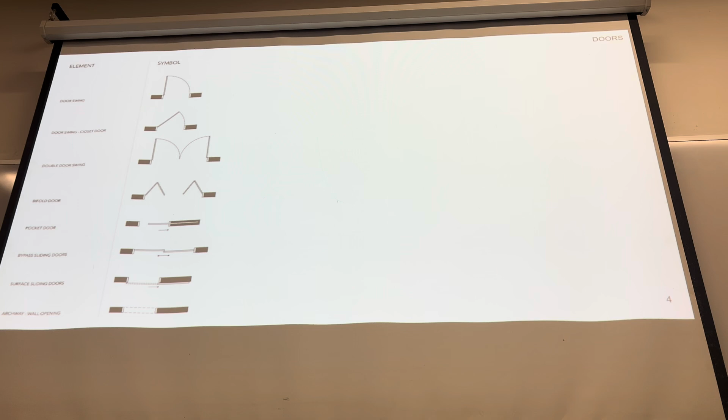Doors, different types of doors. Don't put a little tiny 3-foot door at the big grand lobby entrance of your building. Think about different types of doors. Here's how they might be drawn. Windows, it's the same thing. Windows are about to become a big thing for you. So maybe in your unit plans or floor plans, you're not drawing the window with a double line, but you're indicating with a little box or something where those might start to go.

That's going to start to be the thing that feeds into your unit plan organization, because that's the hardest thing, getting the light and air access to the rooms that need it. Which rooms need access to light and air? Bedroom. Which other rooms? Kitchen. Nope. Bathroom. Living room. No bathroom. The living room and the bedrooms need access to light and air. And that means operable windows. Skylights don't count as operable windows.

Bathrooms and kitchens do not necessarily, although it's always nice. The more light you can bring into the apartment, the better. But also keep in mind that furniture goes on walls, things go on walls. If your whole building is glass, you're gonna be looking up at those things. We talked a little bit about that on the site visit, what's the right size and the sill height for a residential window. Okay.

Nice. Just to kind of a look at sort of how those things might start to come together. This lecture is also kind of pieced together from a lot of other stuff, but I think this is just kind of thinking about line type and how you're kind of communicating stuff.

Again, not expecting to see this on Tuesday, but in the bottom, when you use the final piece, you're gonna expect dimensions and everything on it? No dimensions. This is annotated. You guys don't need to be annotating things. You'll probably be looking at something more like this. So you'll have double thick walls for sure. You're gonna be drawing furniture for sure.

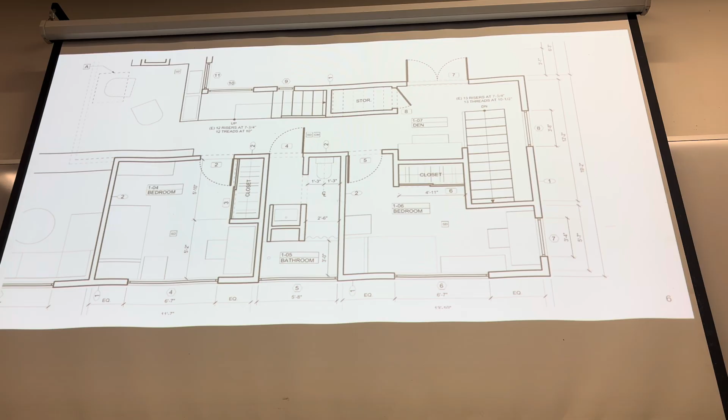Room organizations. Building Construction Illustrated, Francis D.K. Ching. Have any of you guys heard of this book? I have it. You have it? Great. I reference it probably once to 3 times a week in the office. It's full of sticky notes and stuff. Could be a great thing for you guys to purchase. I'm sure the library has some copies. I have an online PDF that I'll also upload to Canvas. Ton of really good information in there.

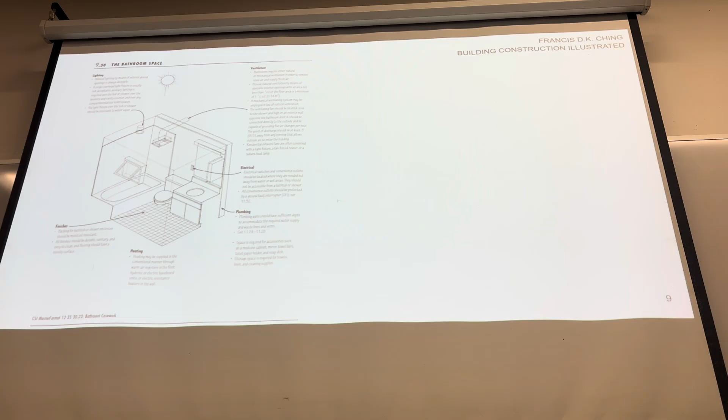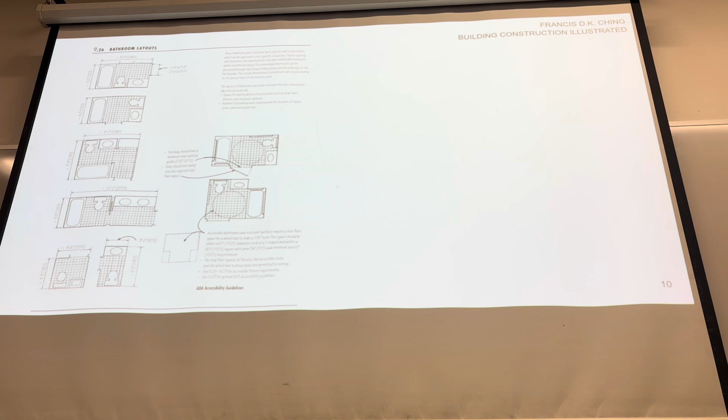This is from that. The bathroom. This is just kind of talking about the general components of the bathroom and how they work. Here are some basic layouts. Again, people have been designing bathrooms for a long, long time. Don't reinvent the wheel here, especially at this early stage of unit plan development. Get a box that's the right size and be working with that. Again, I'm not expecting you guys to necessarily have bathroom zones allocated for Tuesday, but as you're working through them. And there are various clearances that we'll get into once we're working a little closer.

I like to show this plan because here's a lot of kind of typical bathroom layout. As you get further, you might think about this, which is what I would consider the kind of exploded bathroom. As a girl with 4 sisters, you can imagine what our bathroom looked like as we were growing up and how precious time in the bathroom was. What I like about this plan is that you have shower, toilet, and sink all accessible on their own so that 3 people could be using this bathroom at once. So just things for you to think about in terms of the generic way that it's done versus how you might think about it in your space. And that's what that bathroom looks like.

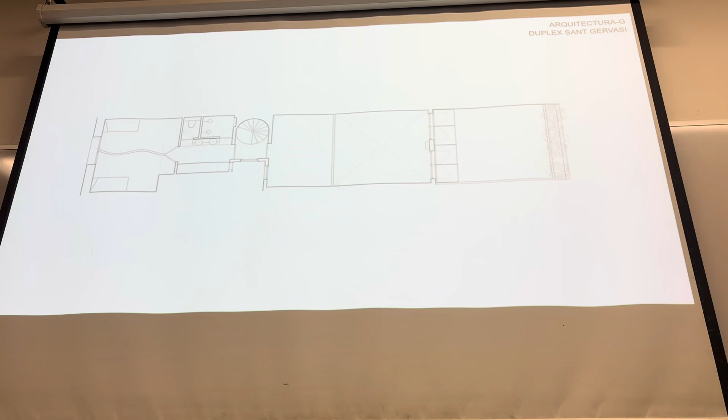This is one of my favorite. I've also gone through and put the name of the architect and the name of the project on every single slide. These are all good things for you to look up and reference. This talks a little bit about the different plumbing fixtures and the clearances around them. The kitchen space.

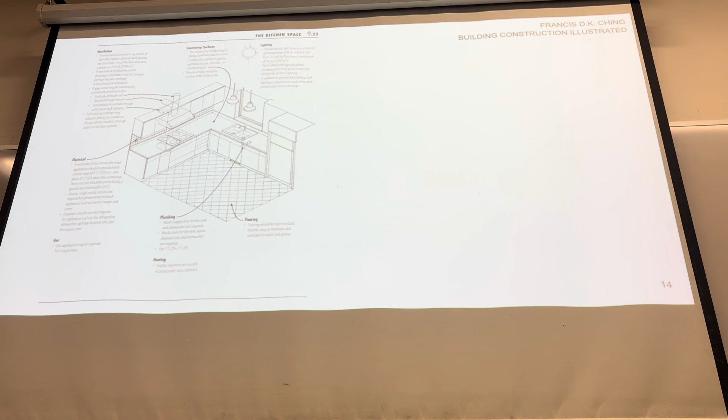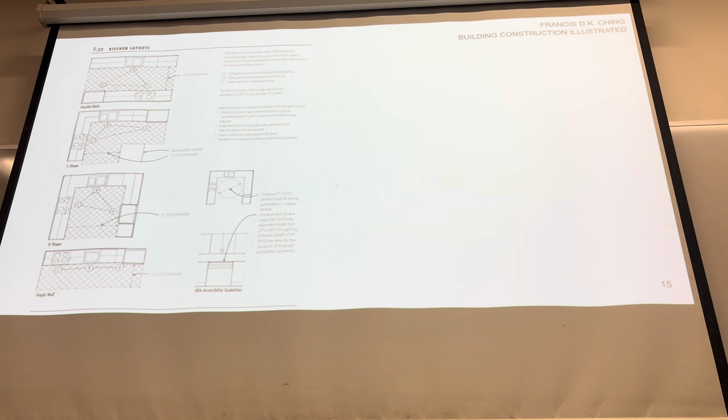Some general kitchen layouts. An important thing to think about is the relationship between the 3 main components of a working kitchen: the food storage, refrigerator, big one, the sink, and the cook surface. So this is talking about triangle organizations, which has always been the most effective way of working at it. A linear layout also works, but ideally you're trying to minimize distances between those things in order to make the kitchen efficient to use. And this then talks a little bit about where those things might go and how much space they take up. And again, we'll get into these details later, but I just wanted you to have them in front of you.

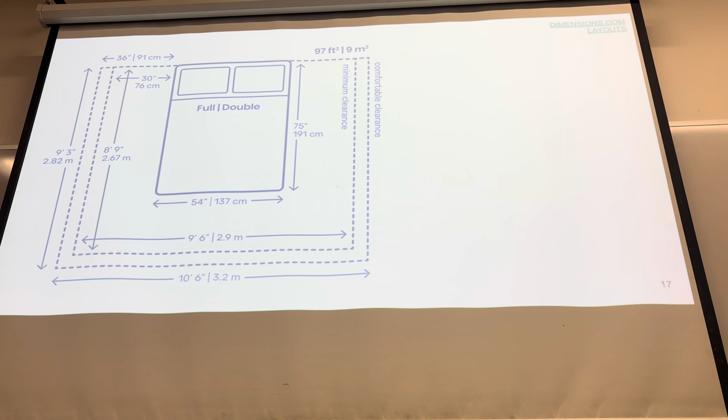This is dimensions.com. I think it's a very helpful website. It has furniture blocks, first of all. You can get some stuff for free, you can make an account and maybe pay for some stuff. Anyway, generally how much space things should have around them and how big things like a double bed are, general room layouts for bedrooms and things like that.

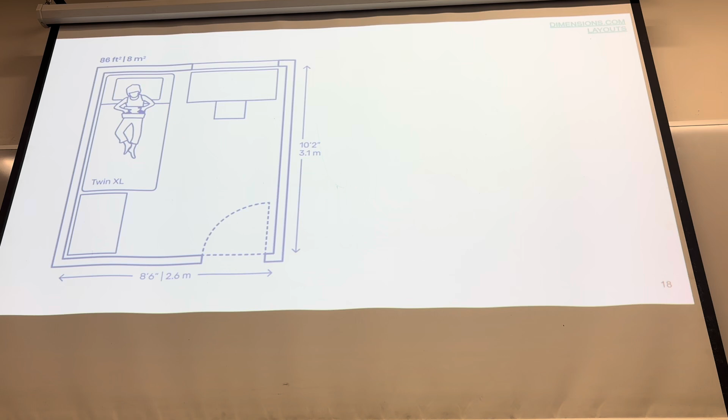I think 8'6" is a pretty minimal kind of dimension for a bedroom. So this is going to become relevant as you have a 6,000 square foot unit, which we're maybe not going to have anymore, and you're trying to fit 5 bedrooms in it: how is that wall with the window access getting divided up and broken into these rooms? I don't want to see 5 foot wide, 20 feet long bedrooms, because that rectangle is not really usable with bedroom furniture, right?

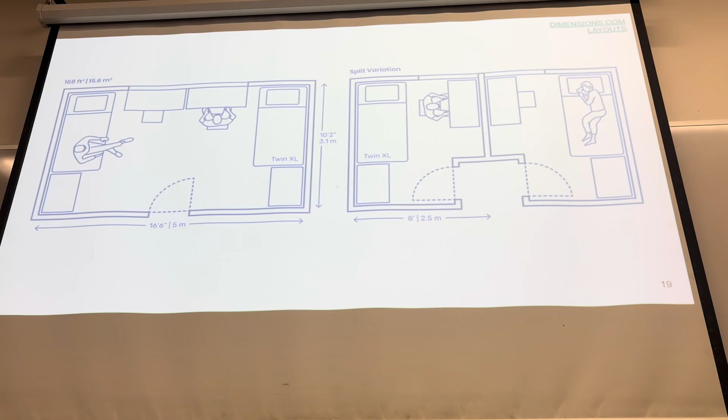Thinking about just the difference between living with your sibling in the same room, ideas about privacy, versus splitting that and having this very different relationship to someone and this very different idea about public and private within the unit.

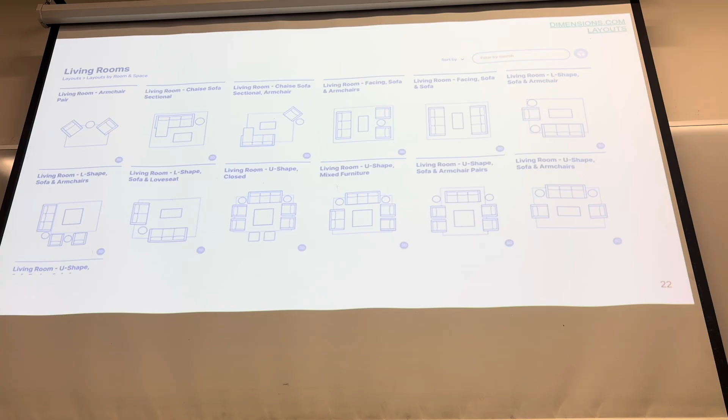This is sort of a weird place for this to be, but this is an interesting apartment. I think it actually comes up in here. I'm gonna talk about it in a different slide because it's somewhere else in here. Again, bedroom layouts, living room furniture, they have all that kind of stuff there. I would, again, grab these things as blocks just so you understand the scale of what's happening.

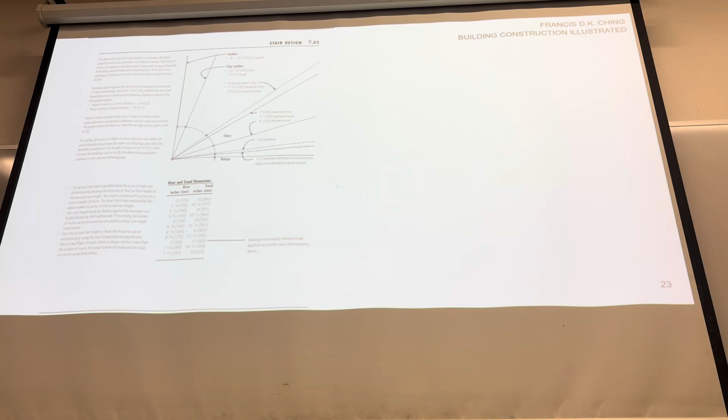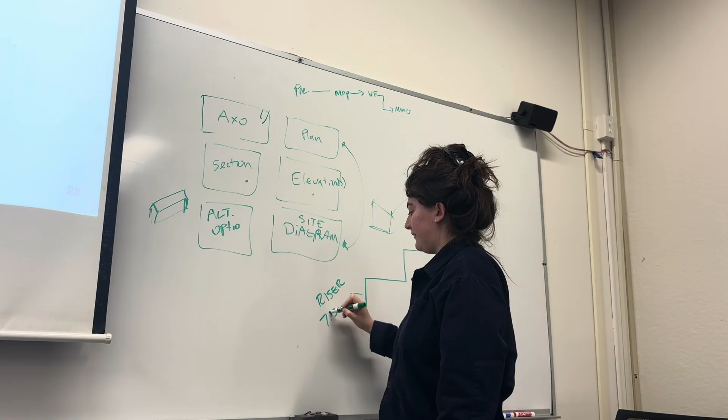Stairs, everybody please write this down. Your stair, so, okay, here's a stair. This part of the stair, does anyone know what that's called? The riser, great. Your riser can be a maximum of 7.5 inches, max, okay? Minimum 4, right? I don't think that you're really gonna be dealing with minimums too much in the stair.

The stair is a big thing. A lot of you have 2-story units. You're gonna be able to fit stairs in these units. The stairs are a good thing to put in places where you don't have light. But the double high space that's created by that is also something really interesting to think about. Think about those sectional connections. 2-story units are lovely. Think about taking advantage of that.

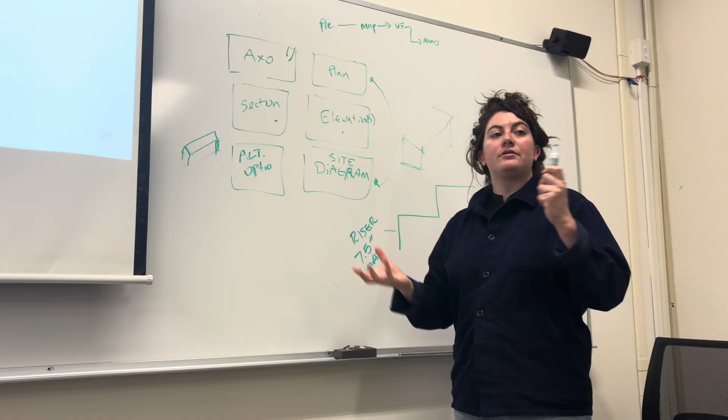If it's just a big floor on top of another floor with just the hole big enough for the stair, it's kind of just like a 1-story unit, right? How can you think about introducing some double high spaces? This is relevant internal to the unit and also in your circulation and in more of your public spaces. How are you bringing that kind of openness sectionally into your section?

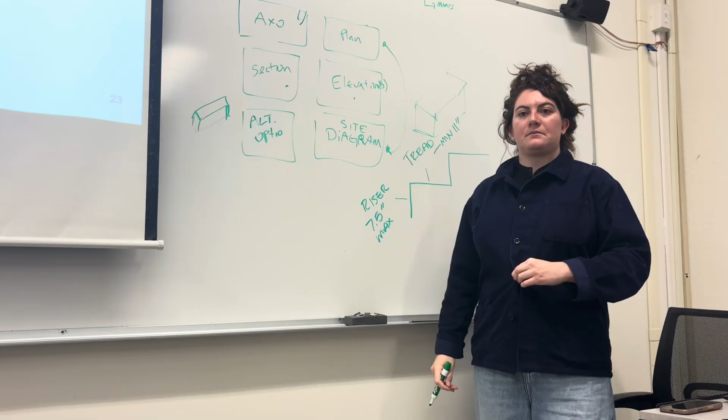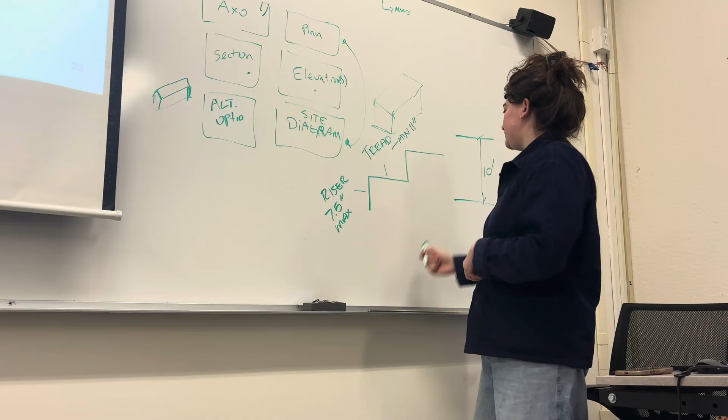What's this one called? Run. This is called the tread. That's where your foot goes. I'm gonna call the minimum for this 11 inches. Okay? So I'm telling you this because let's say your floors are 10 feet apart, right? The first thing you should do is take 10, multiply it by 12. I've got 120 vertical inches.

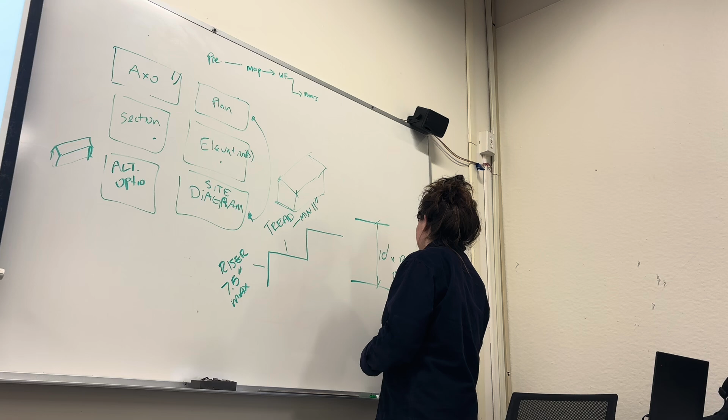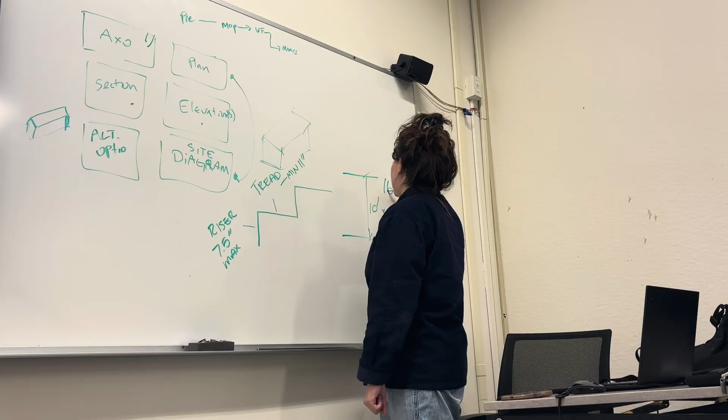Now I'm gonna divide that by 7.5. Does someone wanna do that for me really quickly? It's gonna be about 15. 16 flat. Nice. So if you have 10-foot floors, it means you're looking at 16 risers in order to get me there, right? And that means I need 15 treads, because the landing is at the top. Okay? And those treads are 11 inches long. So that means that you need that much length of space to fit your stair in.

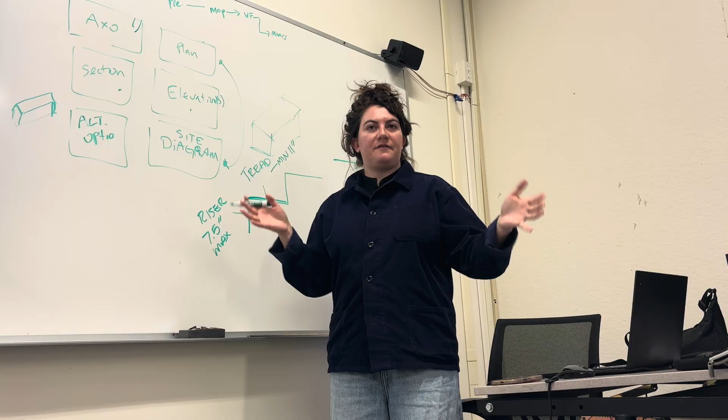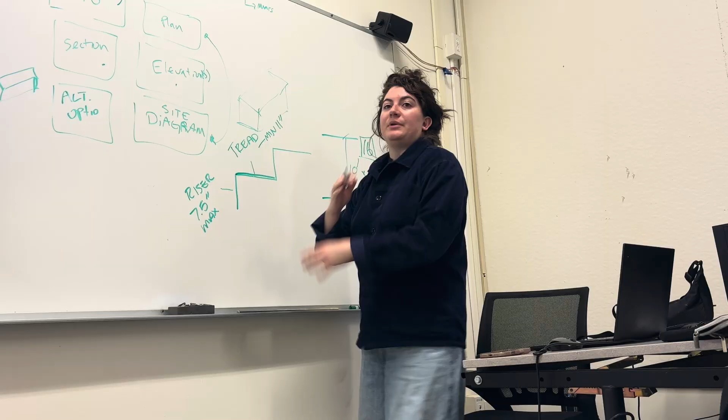You can look at the Ching book here, sorry. Some different ways that stairs can be organized. They can be spirals, they can switch back on each other, they can just be straight runs. You guys can get creative with that. Maybe in some of your bigger spaces or even in the unit, if you have triangular sort of zones, maybe that starts to become a sort of special stair, right? Some of those spaces you can fit that in.

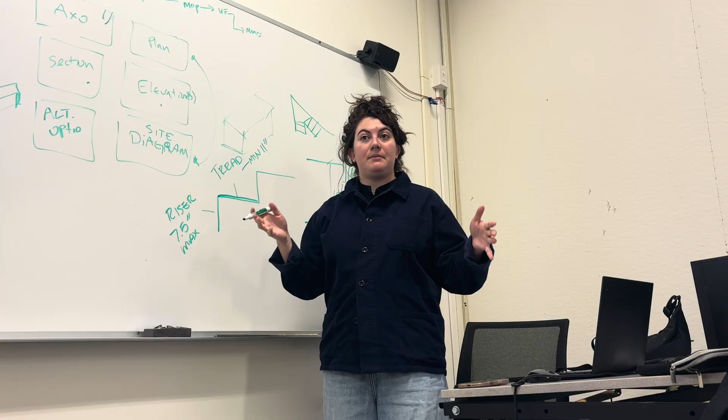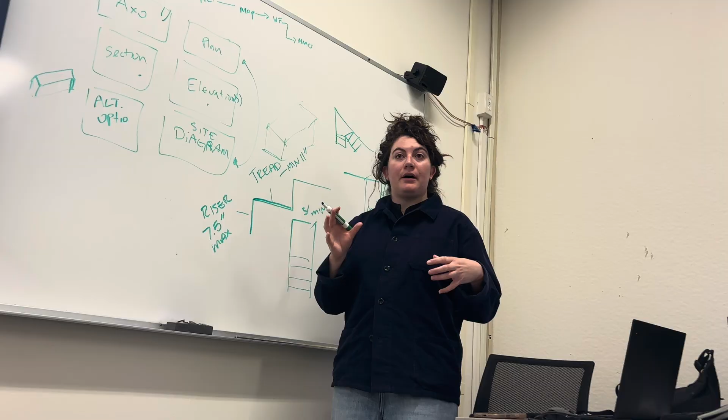The stair needs to be 3 feet wide, minimum, right? Okay, and at the top and bottom, you need a 3-foot by 3-foot landing, okay? And remember, let's say I have a staircase, I'm just gonna erase this.

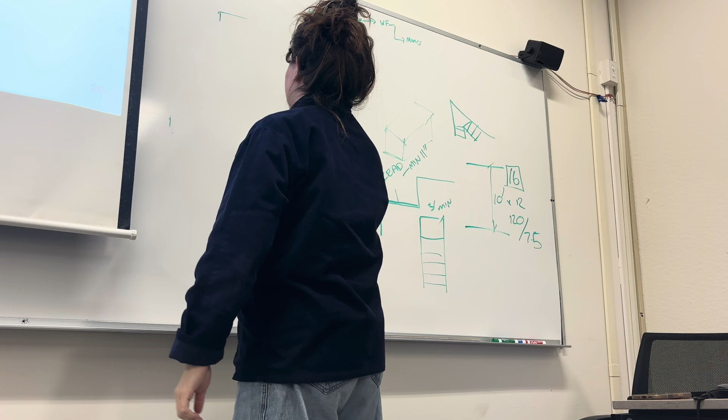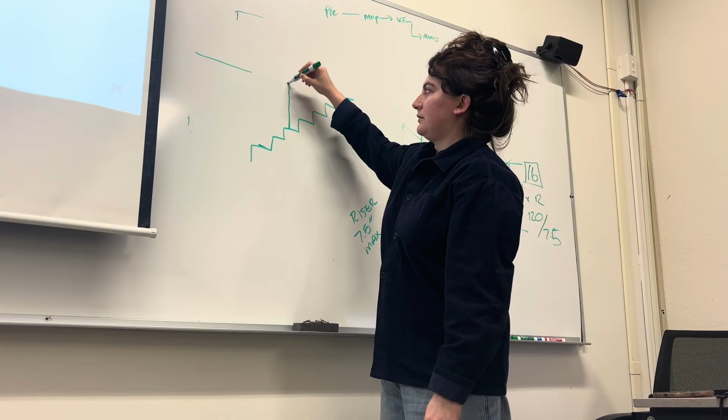Beautiful. Here's my floor, right? I need a hole in this floor in order for my head not to hit the ceiling. I've had this conversation a lot of times with third-year students that don't understand that you need a hole above the stairs in order to fit them.

And I say that kind of jokingly, but it's hard. These are really kind of spatial relationships between plan and section and the human body that are difficult to grasp. Thinking spatially doesn't come naturally to everybody. It's important for being an architect. You can always learn these things, and that's where you're kind of, you know, a guardrail there, there's your landing.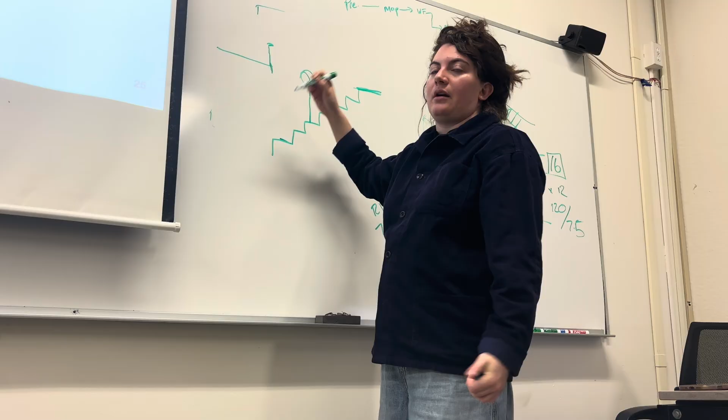This is all of a sudden now this kind of sectional relationship between these two floors. So make sure that you're also thinking about the implications on the second floor of that stair, i.e. a hole, so that you can do it. Again, the minimum head height in a stair is 6'8". So this thing could hang over a little bit.

We have projects where we really capitalize on that. Especially if you have 10-foot floors, you don't need the entire floor to be a hole, but that hole needs to be big enough so that at least at 6'8", this guy's really tall, you're good. Does that make sense? Okay, that'll be an important one going forward. So stairs, again, all kinds of stairs.

Okay, now I'm gonna talk about unit organizations. I've made a series of diagrams, thinking about objects, perimeters, and zones. There's a ton of ways to design units. Look at as many unit plans as you can. We've all talked about Divisare, right? Great one. You can look at plans of apartments. While you're on spring break, just spend an hour, look through some stuff, get inspired.

Objects. So, things that don't need light, for example. These diagrams are a little bit based on more of an ADU or a building that might have access to light on all four sides. But thinking about this in terms of your unit, the objects can start to divide space in a nice way. I would try to eliminate a lot of walls that just separate spaces and try to pack those walls with program that you also need to include. Closets are a really good way to do that.

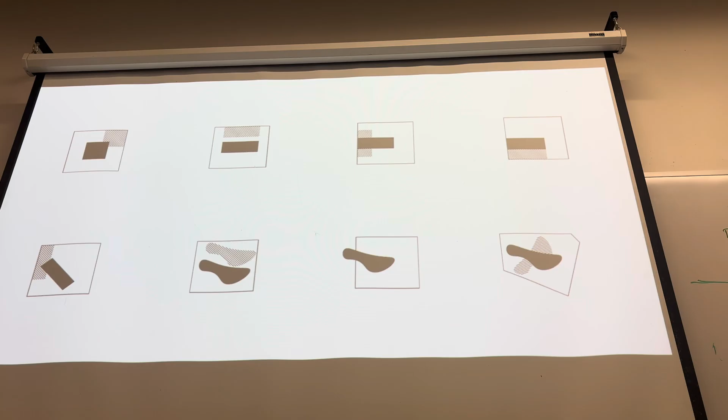Sorry, bear with me on this. The spaces between them become like transition zones, and you're producing these different size shapes by the way that you're positioning that chunk of object. Some plans that start to do that. These are maybe more the size of a unit plan for this one, right? See how that's working? We have the bathroom and laundry here. There's not really any just walls in this plan. This is acting as a separation of the space between these two things.

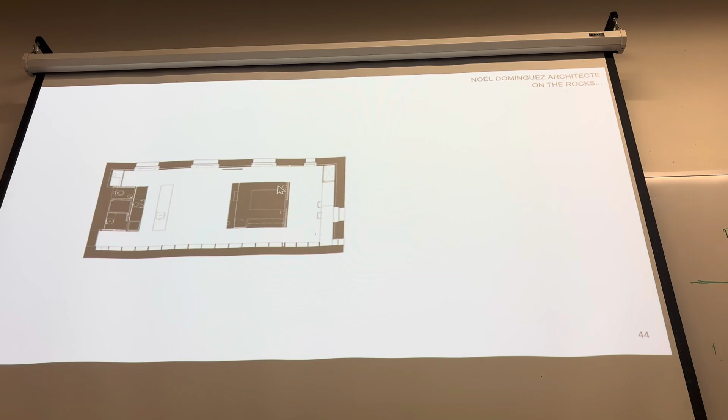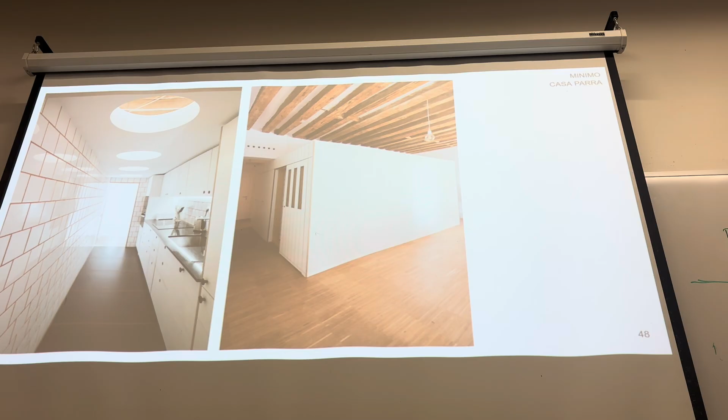Another one, in this case, the bedroom has become this isolated object. Again, you have a living space over here, kitchen and bathroom that don't need light occupying that center, and a bedroom back over here. Another one, there's a lot of these. I'm gonna go quickly through them. Here's the way that that object starts to get articulated as that object. This is that kitchen, that's this plan. You can see the holes, the little skylights there.

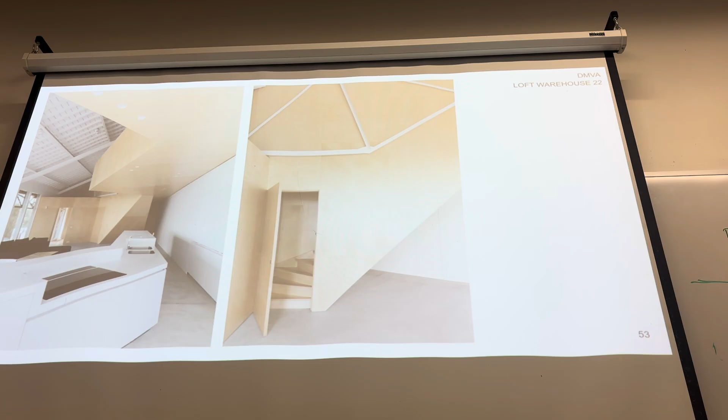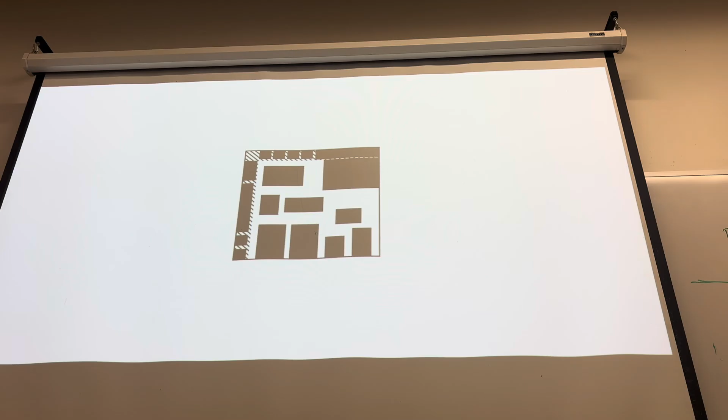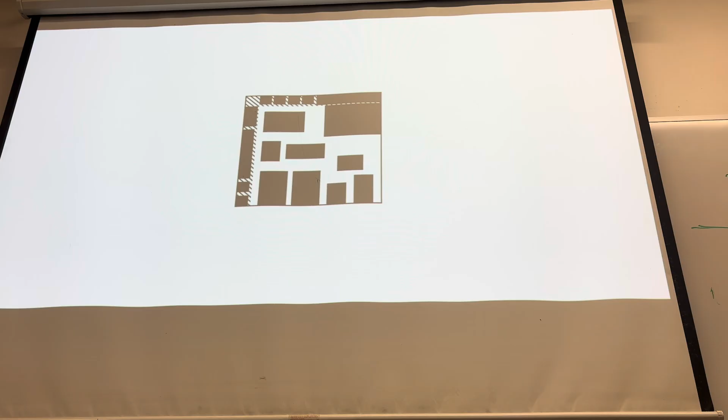More and more. This is starting to become a sectional object, dividing the space. Okay, perimeters might be another way to do this. This is that photo I took before. So you've got an apartment with a lot of stuff in it, right? These blocks here are starting to represent program and also furniture. You can start to pack walls with that furniture and program. Kitchens are a great thing to do this, especially walls that don't have light. You pack that full of closets, kitchens, things like that, and these are showing how that can grow out.

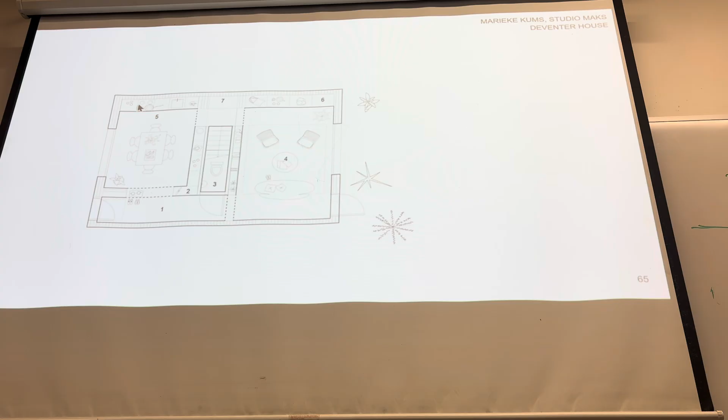Here you see it kind of, I think we're entering here. This is representing like an overhead threshold. You've got kitchen, shelves and living space, the stair and the bathroom are kind of packed into that chunk. This is how it goes up on the second floor. This is a little extreme. In section, it's also kind of having that idea of these thickened perimeters.

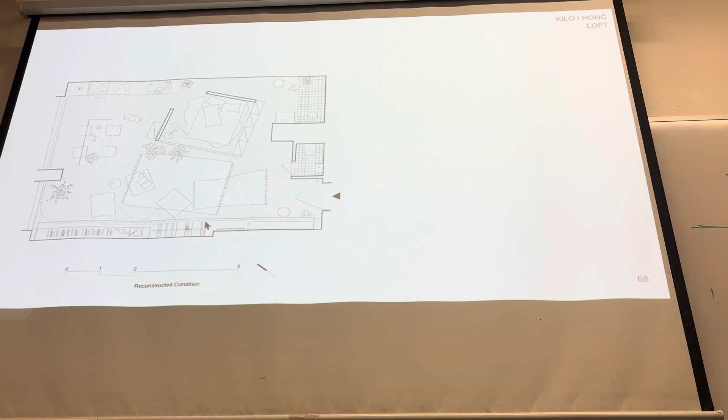So tiny. Here's one that's like, again, the bathroom over here, this was also kind of incorporating a little bit of an object. This is a cool renovation project, with this addition of this wall, and all of that program is kind of packed inside of there, right? Closet, it's unique, a little bathroom that starts to be there, kitchen is sort of a part of that.

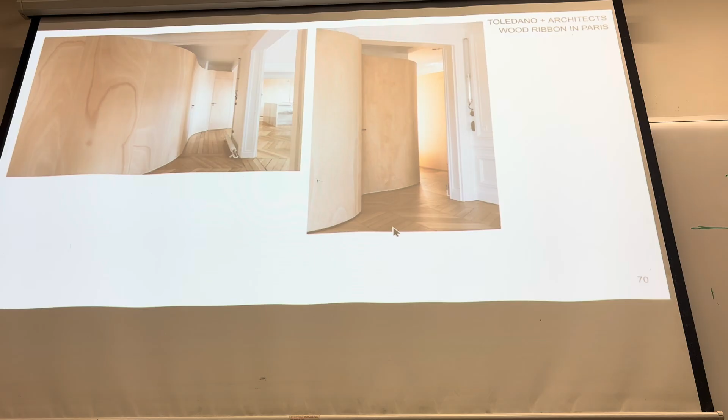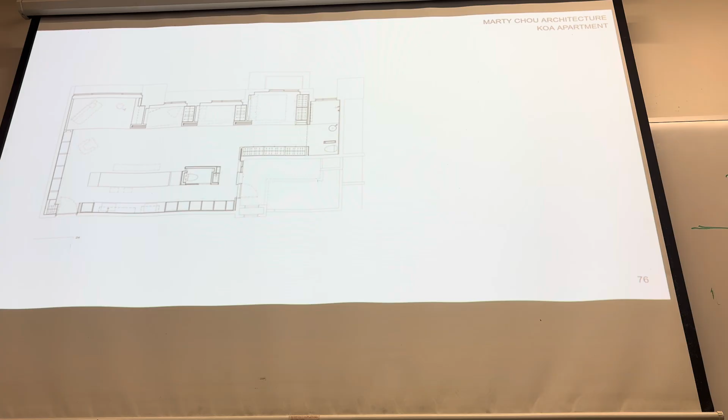So maybe you're working on something like this, especially if you put a lot of kids or something that each have their own little private space, but you're not making these big 120 square foot bedrooms that are eating into the rest of the apartment, right? This is like a little living space and a lot of openness in the bedroom. This could be a 3-bedroom apartment. It's very small, right? So some tricks that you guys can think about. Packed perimeters again.

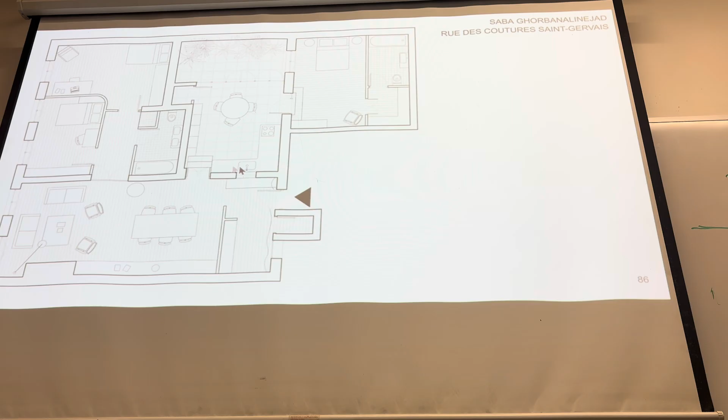This one's really nice. Again, this is not super relevant for you because it has all these sides. A nice one. You guys can look a little closer at these if you want to. Some level change within the apartment, all centered around this courtyard with an open top that's sunken down from these other rooms that are on the perimeter.

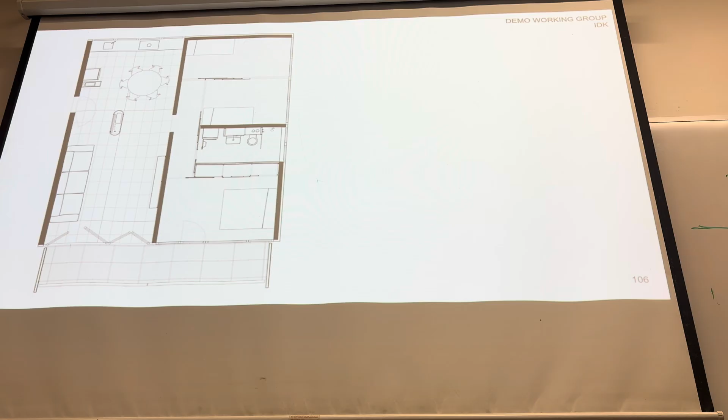Zones, this is pretty important and especially good for a one-sided window look. These zones could be wet zones and dry zones, private zones, public zones, kid zones, adult zones, things like that. Zones can be distributed in different ways. Then you have these little thresholds between potentially. Okay. Here's a public and private with a living and kitchen, 2 bedrooms and a bathroom. This one kind of in 4 ways around. Again, public and private.

This is good, you can see, in this case, the bedroom is borrowing light from the living room. I'd like you guys to try to avoid this kind of thing if you can. We can get there if we really need to, but this is a glass door. You can also do it with walls that are low, so you have clerestory light that's coming in above. There are code rules about that, but for now I'd like us to try to have all of our bedrooms have access to an exterior wall and window. This is a great one.

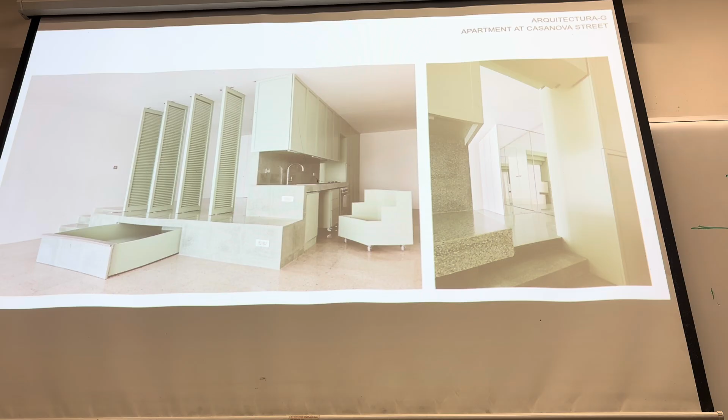This is a cool project, also by that same firm that did the yellow bathroom. So this is actually a storefront on a commercial street that someone turned into this little studio apartment. We put the bed up there behind those little shutters. Little cross wall making these different zones. More zones. Passing through into that back zone.

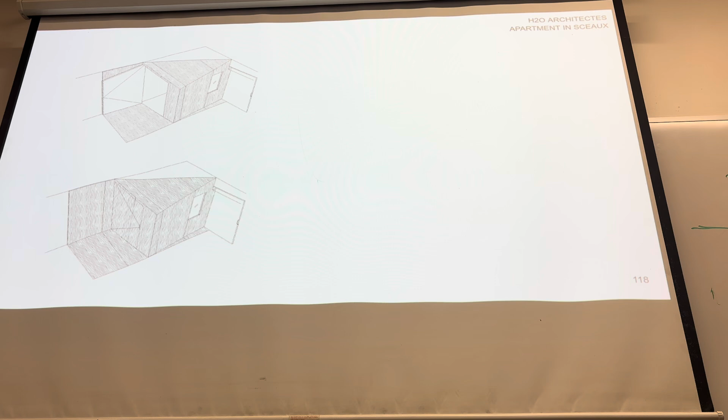Oh, this is a nice one where the zones are kind of articulated in materiality. Some of the diagrams of that, and that's how that's kind of starting to look in real floor plate organizations, scaling up to the overall apartment building size. We've seen this plan before, right? Again, regular units and allowing that internal space in the middle to become something more dynamic.

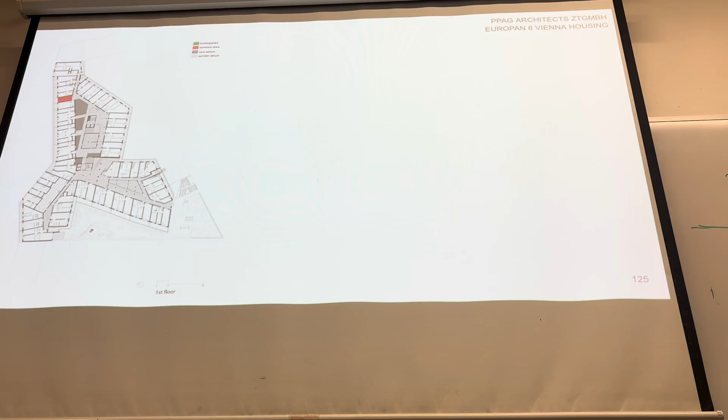I think, Paige, this is kind of good for you, maybe. I would really think about drawing that circulation in your plan and your section and letting that really describe the branching, and then your sort of fitting units around in between there. I've seen a couple of these before, I think. Again, the kind of circulation and core being on that interior.

You guys have these rough ideas kind of drawn out, but giving you some plans to just look at as reference. And notice here that this is sort of taking the irregularity of the shape and making these things much more straight. I think all of your lines should probably be perpendicular to that exterior wall, so you're getting square spaces that are easy to fit stuff into. And then things like bathrooms and maybe a dining room off of that can start to occupy those spaces.

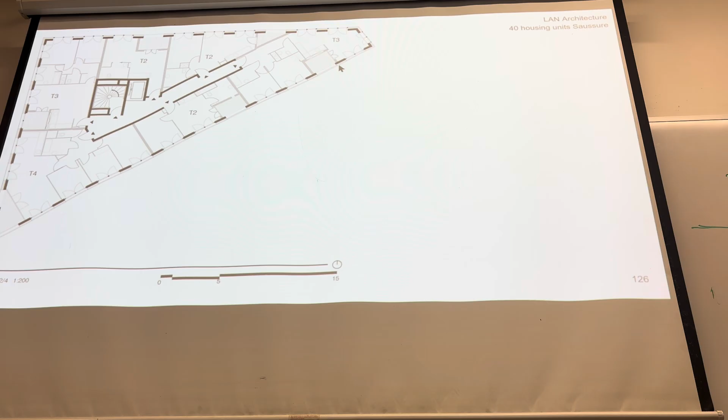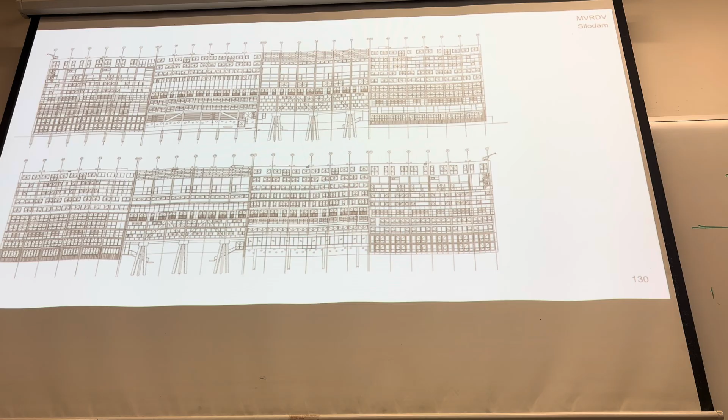There's an axon of that. Again, here's kind of chunks of core. I think we've seen this one before. That's the elevation of it. This is a weird one. I really like this one.

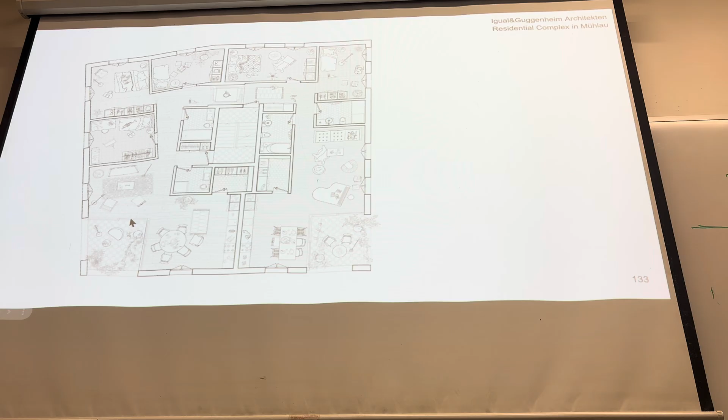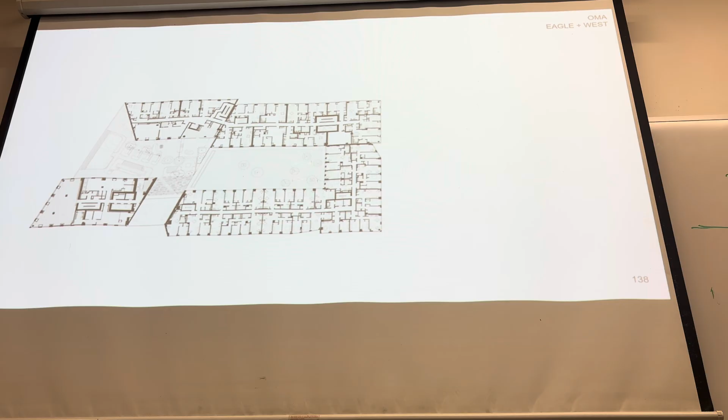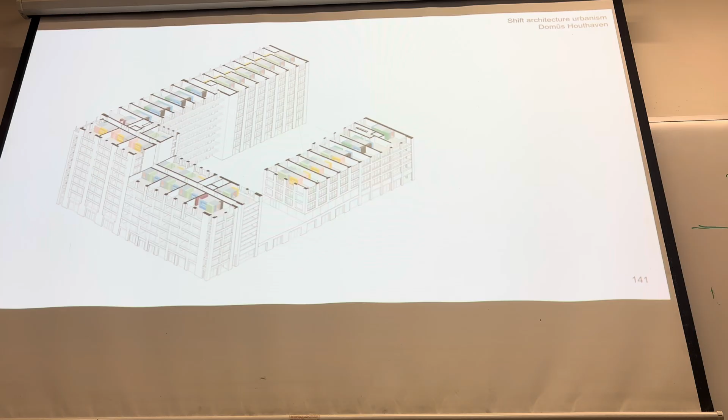Again, you guys can look at these a little bit more dynamically. And these are probably gonna be around the scale of drawing that you guys are doing. This is a little too small. I don't like this one, I should take this one out. These units are too skinny. This is them, I think they're too skinny. But that's kind of incorporating a similar bed cave object sort of situation.

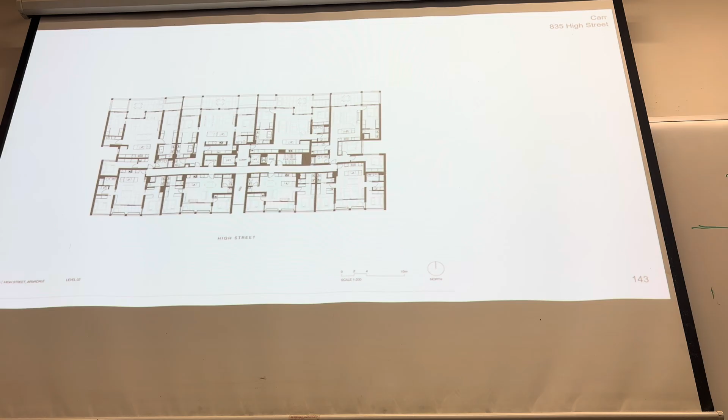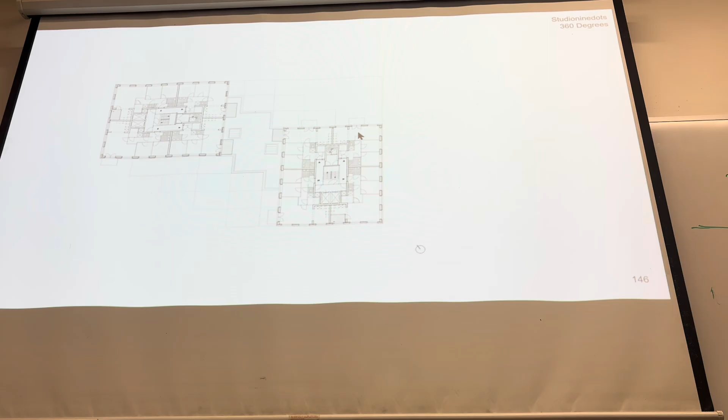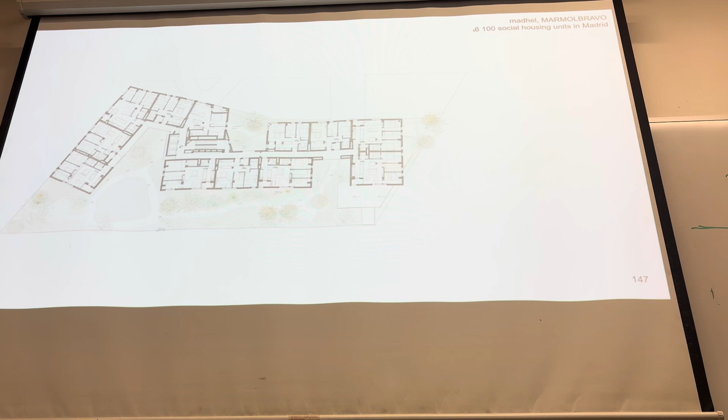This is kind of a good one for you, Zion. How the hallway is starting to not always have the same relationship to the units, and kind of maze and meander through a little bit, pushing out to the perimeter in certain parts and cutting through the building in certain parts. Another one. Oh, sorry, I'm gonna go back to that one. Yeah, and this one I think is also relevant for your mazing.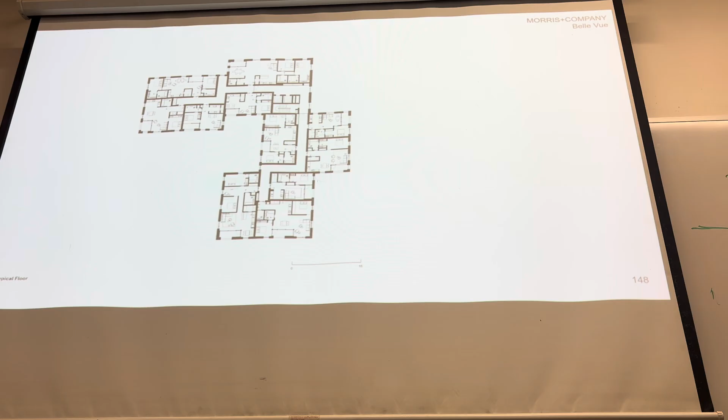Take the picture of the names, dude. Well, I'm gonna upload this, you guys will have all of this. Okay. Yeah.

Maybe that becomes something more like this, where it gets broken up into 2 or 3 or even 4, and you can start to have these weirder shaped plates with that central area more free, and a clearer organization around the perimeter of those unique shapes. I know you guys are tired, I'm sorry.

This is what you get when you think about that core taking the weird shape, right? Everyone's drawing vertical circulation right now as boxes, which is completely fine for where we're at. But here, the units become much more regular in thickness, and that interior space kind of gets weird.

You can see here, there's like some holes, that's a cut in the floor plate next to the stair. And these kinds of cuts make that vertical circulation much more dynamic and a nice kind of light-filled space. So let these spaces be the thing that kind of get a little weird and special. It makes the procession up into your unit much nicer than just walking in like a rectangular box that's sort of stacked on top of each other. And it allows you to bring regularity to the size, or the shape, of the unit.

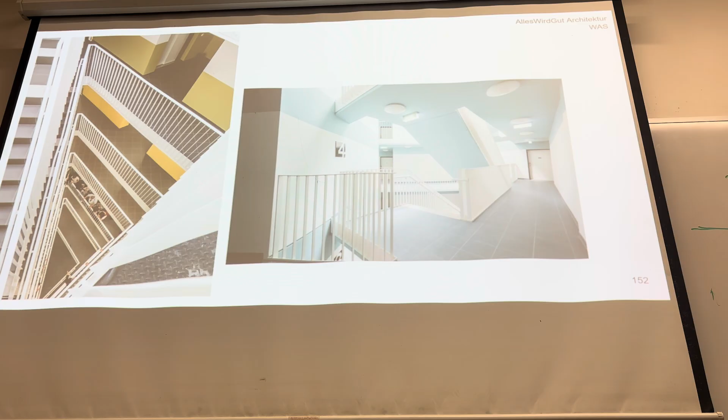I know I'm throwing so much at you guys, but I just wanna put these in front of you. How are you doing? Is it helpful? Good? Yes. Okay, okay, we're almost done.

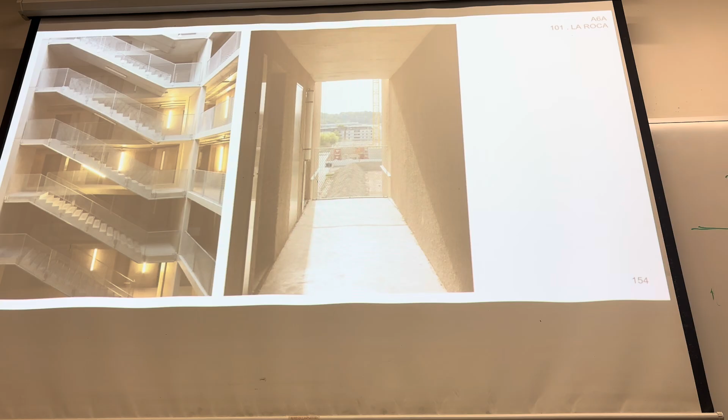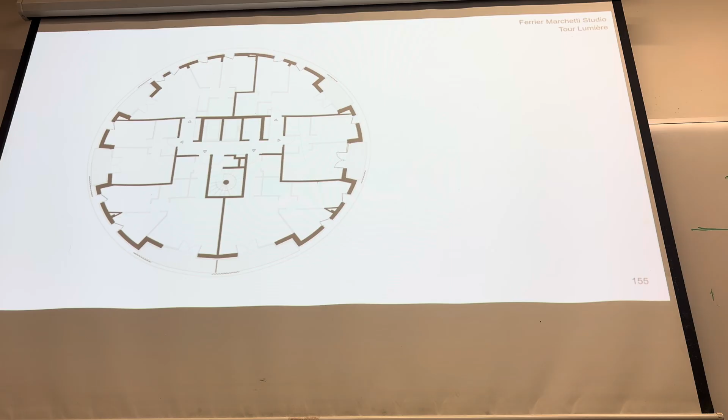And like you could maybe take this, right? And copy it into multiple units, and then the edge or whatever can be different or triangle shaped or weird. But the core of what you're doing is copy paste. You want to get as much copy paste going as you can. That's this diagram essentially, where the core and everything is consistent, the units become a little bit different, and the bathrooms are sort of plugged into that core. You can see that that middle part doesn't change.

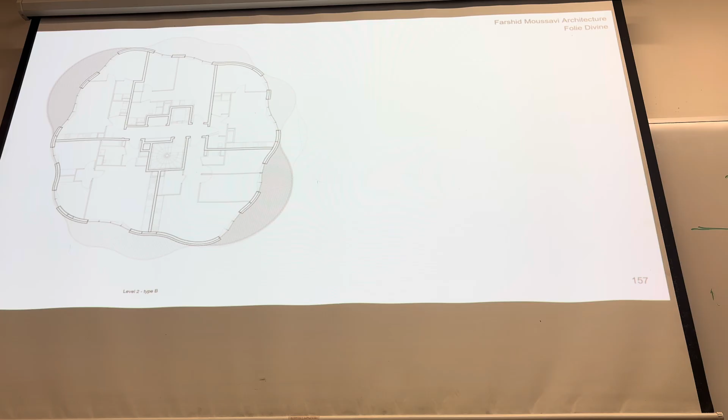So you can see for yourself. What'd you say? That's interesting. This one? No, the... This one? Yeah, it looks like a ninja star. You like that ninja style?

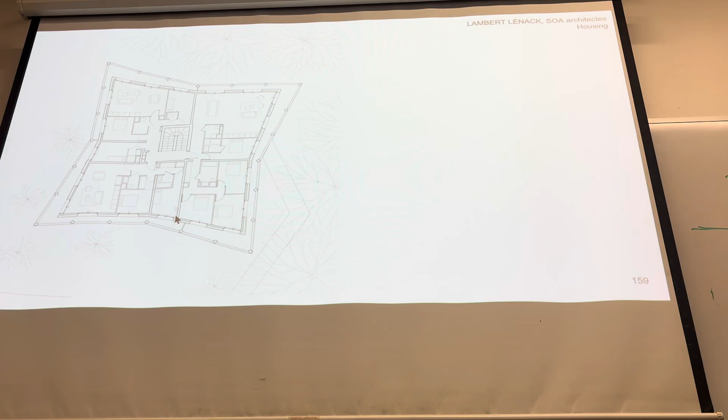Yeah, some of these bedrooms get a little weird. This should be here, but I don't like this. Is that a plan? This is a plan, yep. Here's the core, an elevator and stairs, right? Coming into the unit here, bedroom, bedroom. This looks like a living room. This must be the kitchen here, dining room. Seating area, these look like lounge chairs, maybe that's a terrace. Not sure.

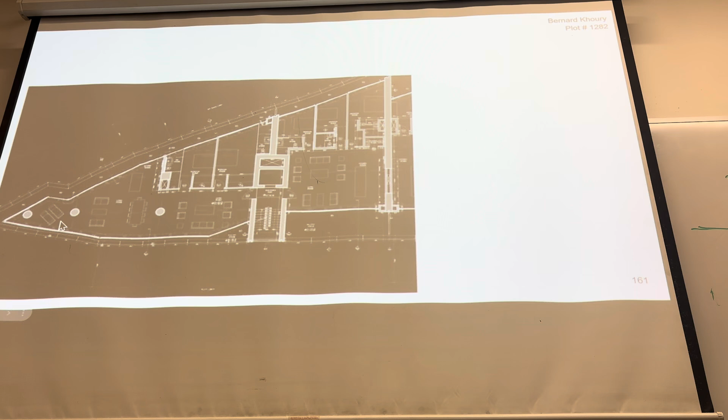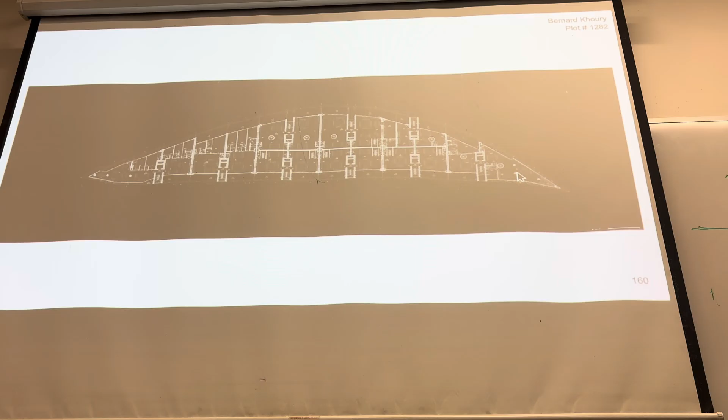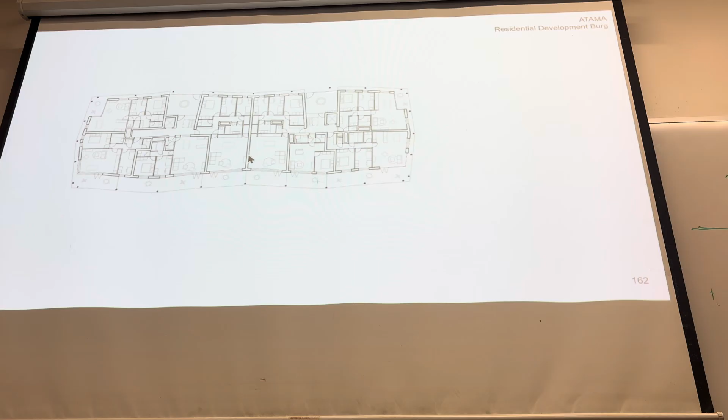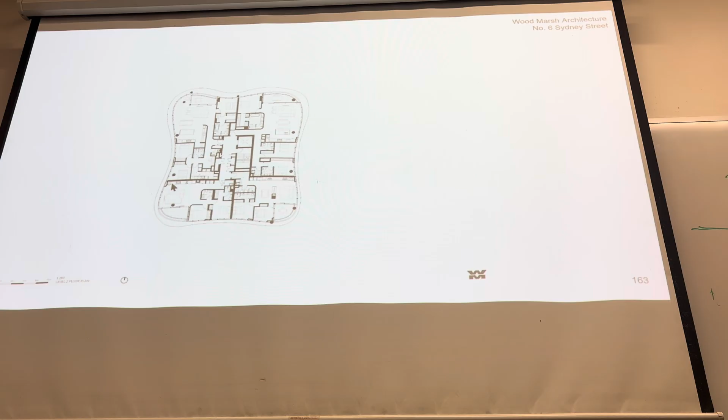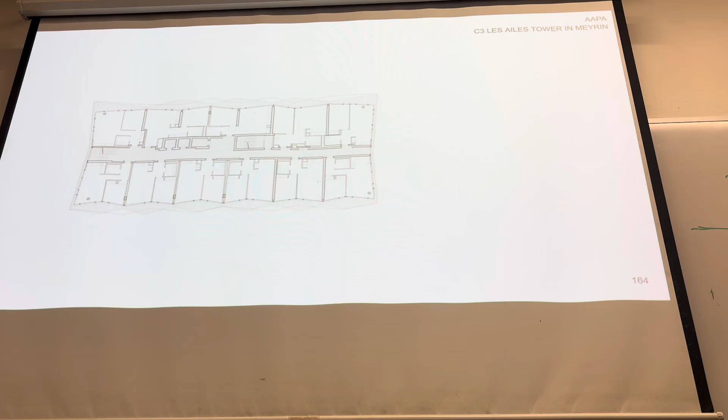This is nice too, kind of using like a fillet language in the bathrooms. And again, things are pretty regular, and the irregular shape just ends up being the edge of that room, where there's still square corners for you to organize furniture. This is really similar to the one we were looking at before. I don't know about this. Let's not do this. Very symmetrical.

I don't think anyone's really here. I wonder what exactly is happening. I think this is a terrace. What'd you say? It looks like a coffin. It does look like a coffin. It's coffin shaped. Terrace, kitchen. Yeah, it looks like the kitchen is kind of pushed back, which is a little interesting. You can dine in the light. Dine in the light.

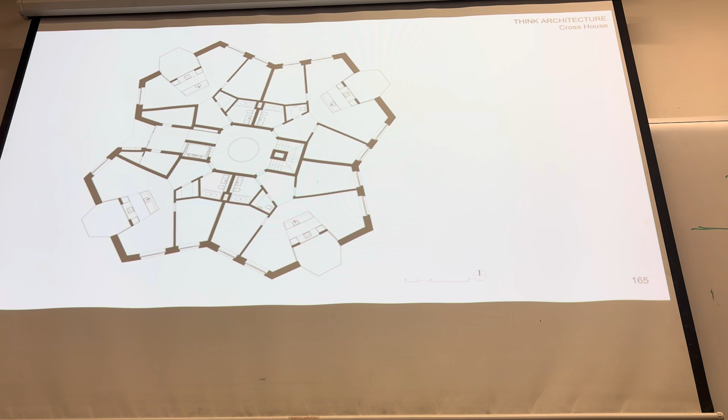Yeah, exactly. And then this is sort of an interesting move. It's like they've taken this wall that was here and pushed it back. It's interesting. But don't do it. It looks like 2 bedrooms, a little powder room, and a bath. It looks kind of nice. How does it feel though? I'd be a little dizzy in there, I think. It's like a maze. No, I don't know about this one.